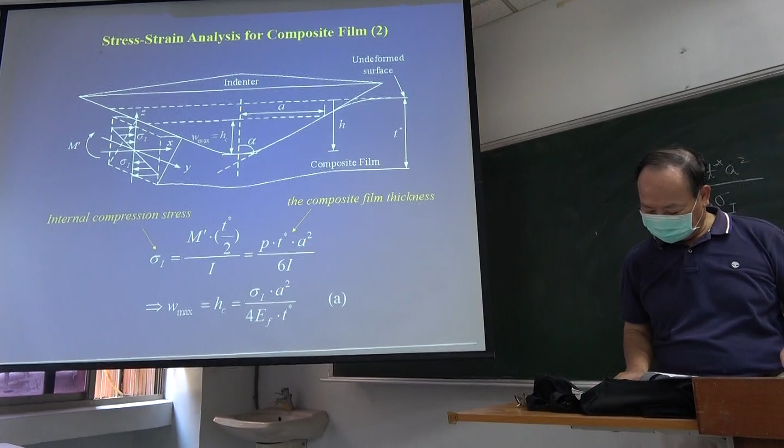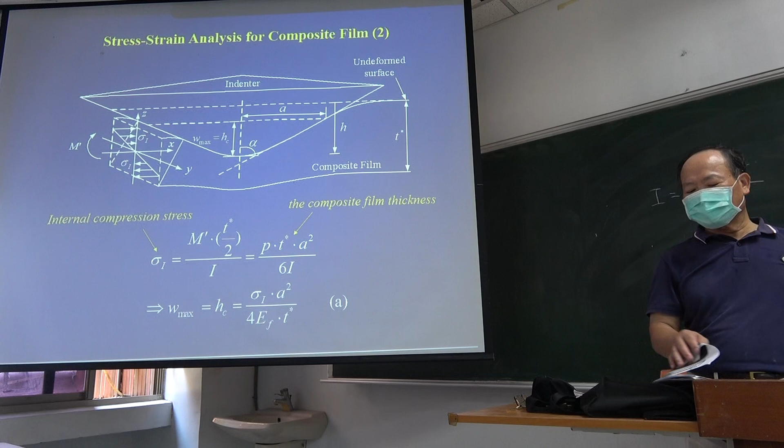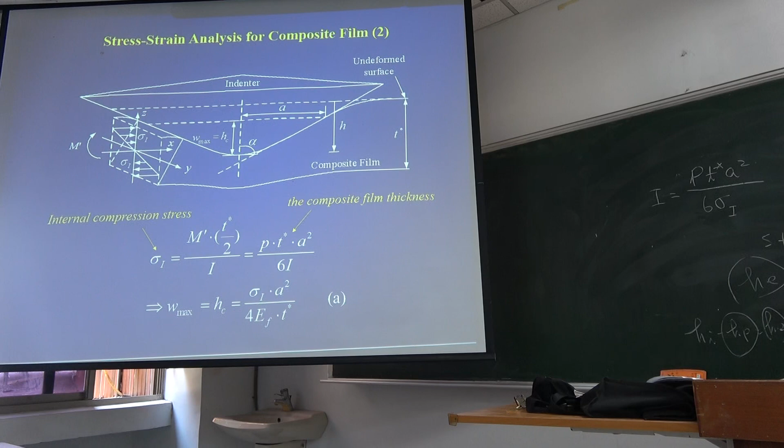Focus your mind on the course, on the class. That's very important because you need those techniques. You hope that in the future you have a good job, but all the good jobs have a very big challenge for you. If you have much knowledge to deal with it, you will feel very happy every day. If you don't have the knowledge, you'll find it's a big challenge. It's torture every day for you.

So you will say, I wanted to work at TSMC. Okay, good. You have a good opportunity to enter TSMC, but you also have a higher risk that you will be fired by TSMC next year. That's because you have to get sufficient knowledge to deal with everyday challenges in the work. There is not a routine work. High pay, high risk, high challenge.

Like my daughter, okay, she works in Tesla. Now she is studying at MIT. Big challenge, high pay. You say TSMC is high pay, but Tesla is about 3 times the pay of TSMC. High pay, of course, but every day is just high risk, high challenge.

Which one do you want? Think about it, all right? So you want something, but you have to pay attention to your task. You have to put in effort that is worth your pay. Your work ability must match your pay.

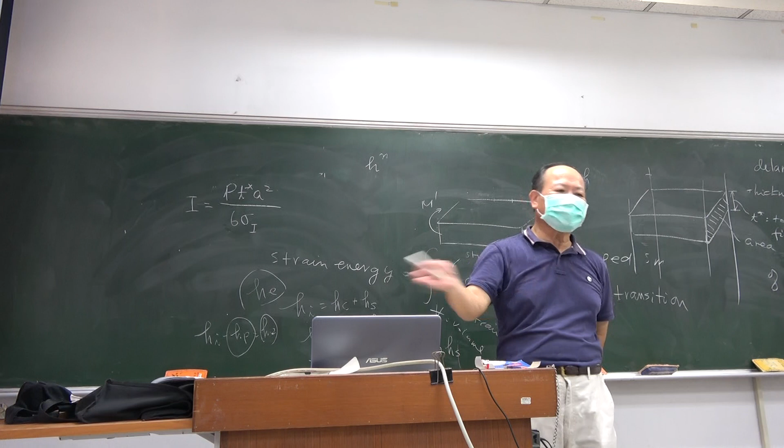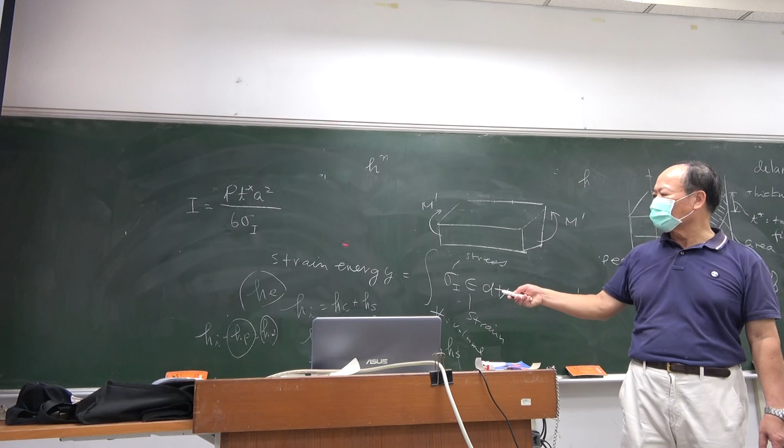Another thing is we can evaluate the different strain energy. Beyond this strain energy, I believe you have some kind of defect taking place in your sampling, okay, all right?

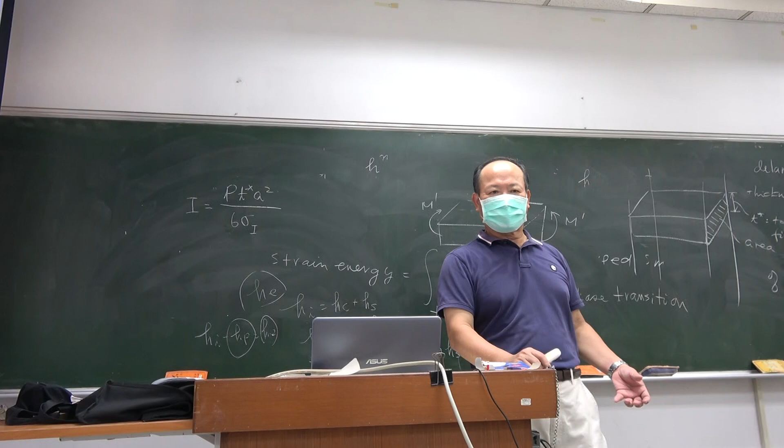Like Samsung developed the IC chip, and then TSMC also developed the same chip. You find that Samsung just has mechanical defects, so there's high resistance, high resistivity, so it's just high power consumption. Power consumption is high, so they cannot compete with the TSMC product. Because within the same field, they have a lot of defects they cannot solve. So this is a real case, this is not a story, okay, it's a real case.

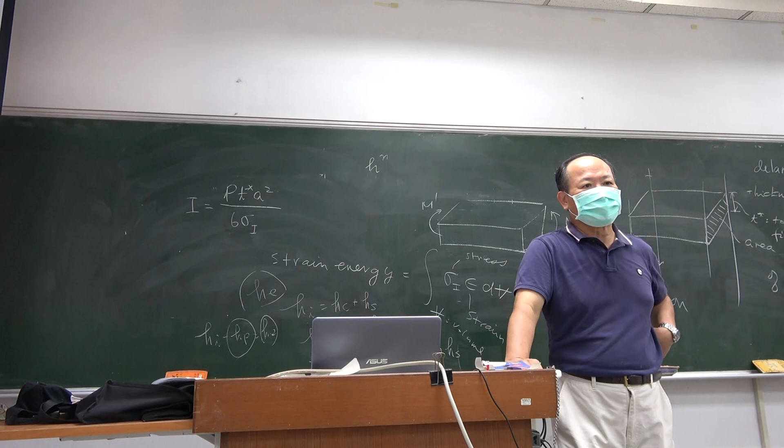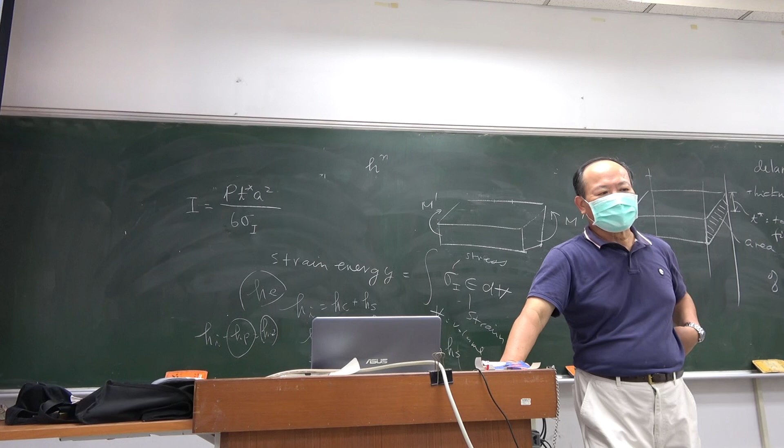So in the competition of TSMC chips, I think how to solve your problem, solve all the defects in your microstructure, becomes very important. Otherwise you prepare the chip, but your ability or capacity or performance is not good, it's inferior to other people's. So this is a big challenge, there's strong competition, okay.

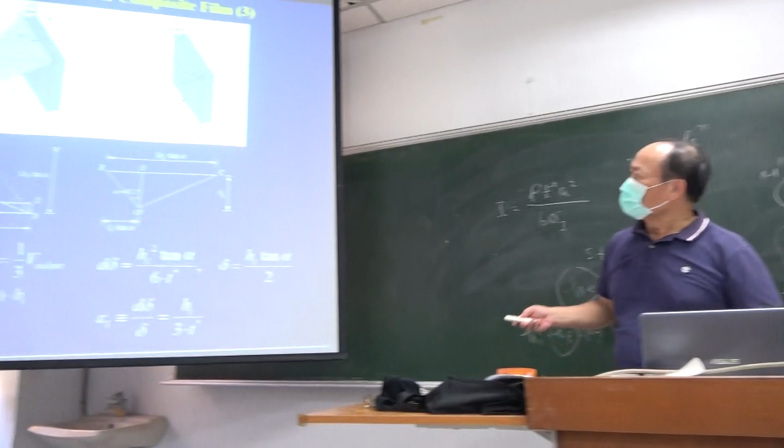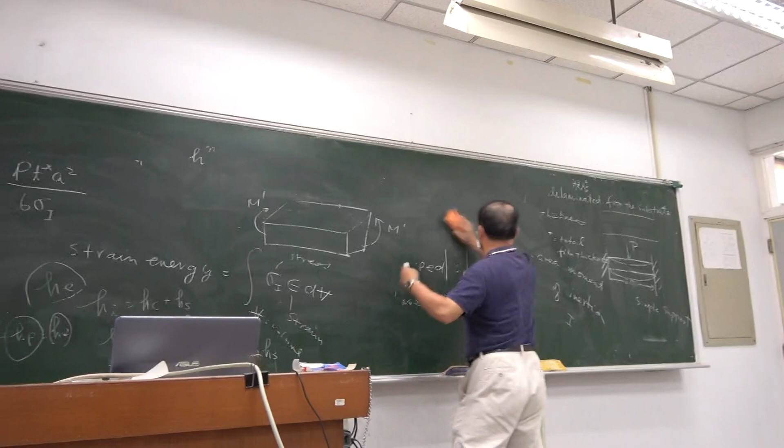This material with constant cross-section - this constant cross-section maybe the cross-section is just a rectangle, okay, like this. And then apply the load P on the other two sides, allowing this material to have tension, have tension outside. Or you can use this constant cross-section, maybe circular cross-section. This is constant cross-section, it's in rectangular form. This is circular form, right?

You prepare your specimen, it looks like this one, and then you apply the P on the two ends of your sample. Originally you have the length - your sample's original length before you apply the load, we call it L. Then if you apply the load, you have the length change, we call it delta L. And the cross section, either this rectangular form or maybe circular cross section, all right, but we apply the same load. We originally have this length, and after applying the load, we have the extension of your sample with delta L. This is one dimension.

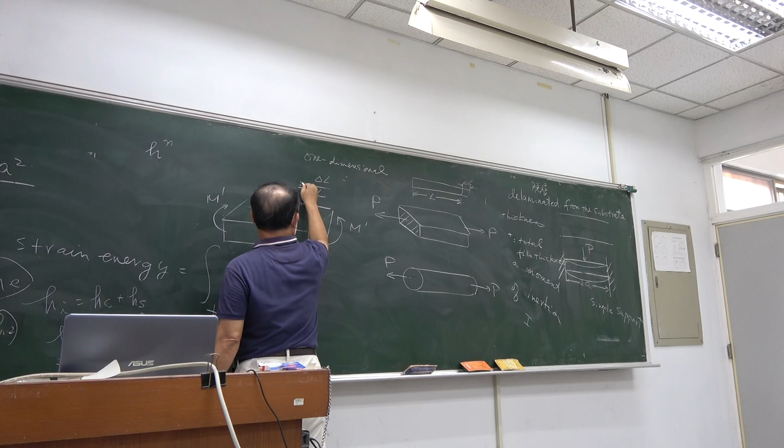Delta L over L, we call the definition. This is strain. This length unit, this is also a length unit. So our strain has no unit.

You will graduate in the future from NCKU. You cannot joke when someone asks you what the strain definition is. You cannot answer wrong, because you are a student at a high level. Some people asking you will give you pay that is relatively high compared with other schools.

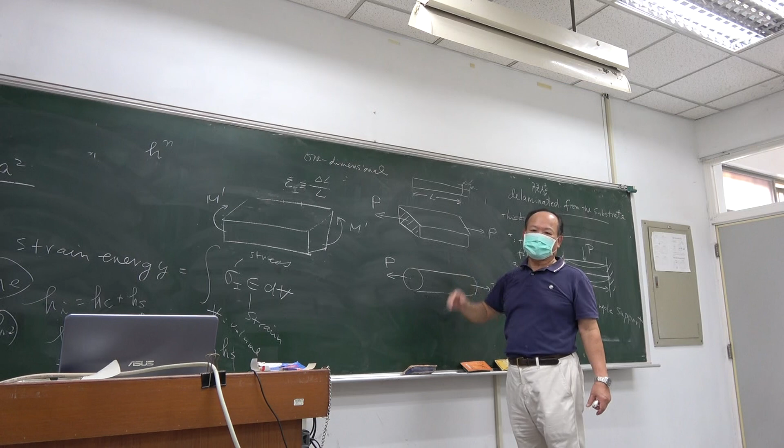So strain has no unit. But your sample should have a constant cross-section. In our case, we use this model. We single out the sample. Our sample is complicated because it's made of several layers of the same film. But we can simplify it to be a rectangular sample and apply the load to the side to obtain the strain.

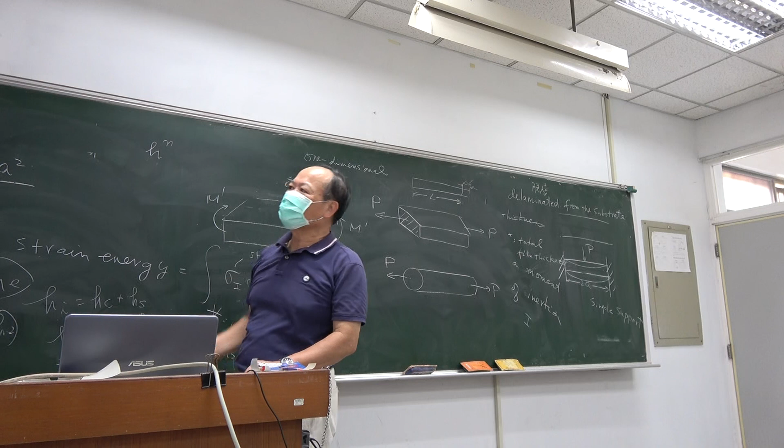Now let me develop the strain first. Here is the indentation depth, here is the indented cavity, the impression mark. Other than the bottom point, this is just other the height. We call this height HC. HC is just the W maximum, like the formula we described in the last PowerPoint.

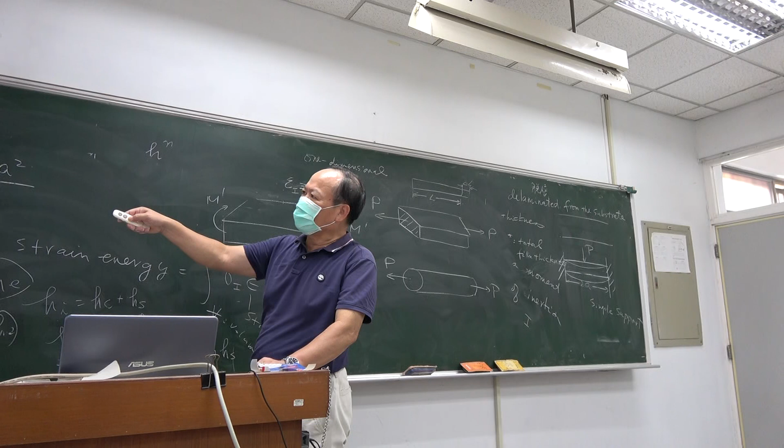Around this central point, this is a regular triangle. Because we use the Berkovich indenter, the cross section of this triangle is a regular triangle. Out of the center, from the bottom here to here, the length is just the real contact depth, obtained from the W maximum. W maximum equals HC, as in the last equation we showed.

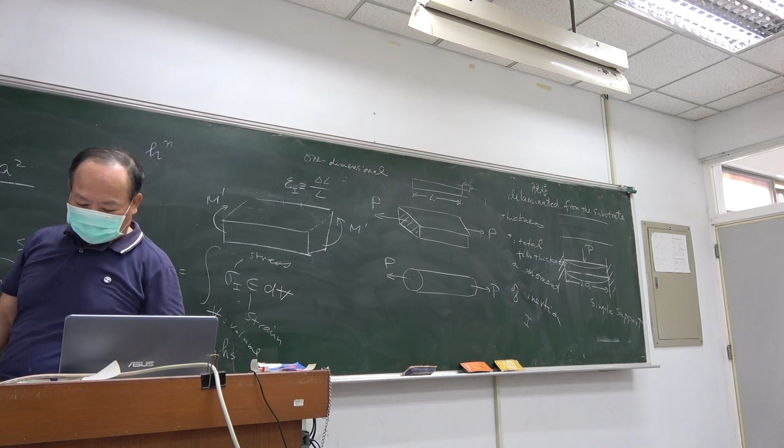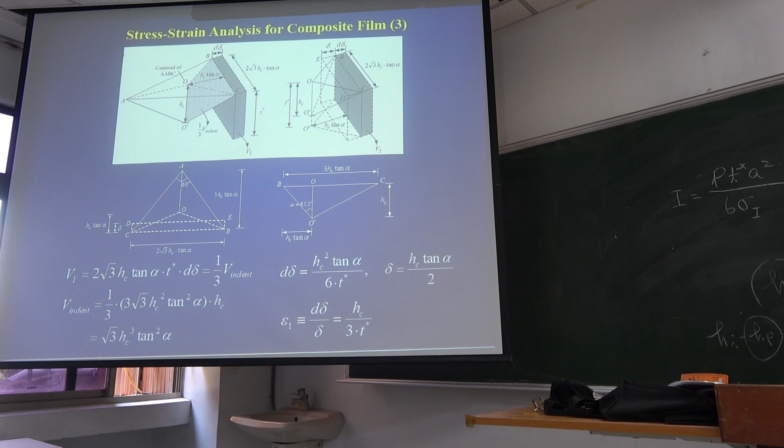Here we have the cavity, the vacancy. This volume of the vacancy can be divided into three portions, because each side has the same length. Each side has the same length, and the length is just this value.

If you have HC, then the side length is just this value. Alpha is just the fixed angle. This cavity volume, the volume of this empty space, can be divided into three portions. One of the three portions is just this gray area, which is just the triangle volume.

This is one-third of the total cavity volume. This value, we allow it to be equal to this rectangular form. Why do we set this volume equal to this one? Because we want to define epsilon for our sample in general, to define our sample as having a constant cross section. So we allow this gray area, this gray volume, created by the real case, to be set equal to this rectangular volume with this single data.

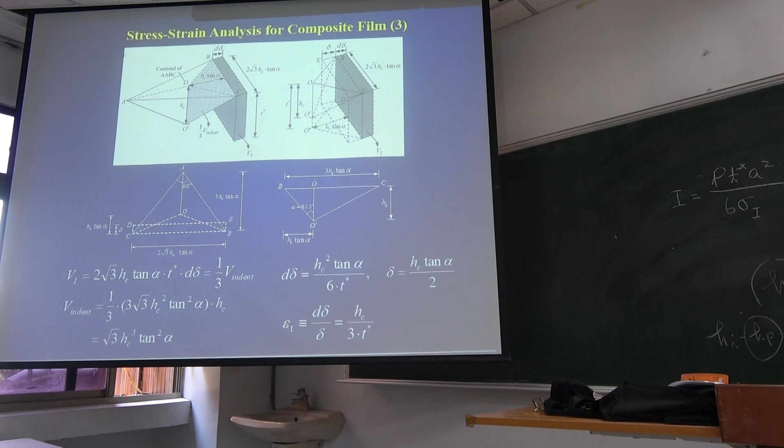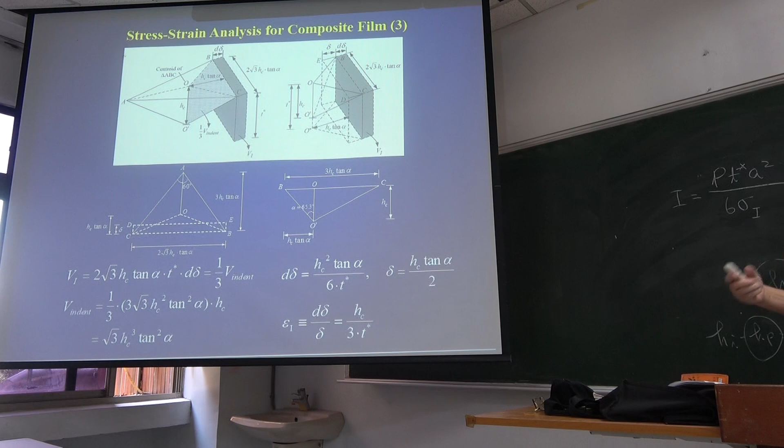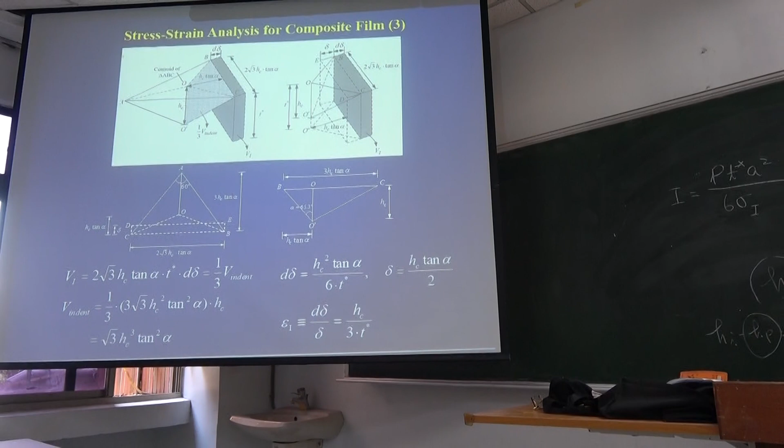We change this cavity in the real indentation case to be assumed to look like a rectangular shape, an extension. This extension with the length change we call d delta, just like this delta L. This delta L is what we applied through the load, creating this rectangular plate extension outward with this length, which we call delta L. This delta L just means the same as d delta. Nevertheless, this rectangular volume equals this gray area, so from this we can determine d delta.

So how do we determine this one? This VI is just one-third of the cavity region, the gray area, which is this volume. This volume is one-third of the total volume. The total volume is V indented.

This is just the total volume, V indented. But this gray area is one-third of the total volume, which is this value. We have the details here. This is just this rectangular frame. This V indented is this value - we have the height, and the cross section is a regular triangle, and the height is just HC. So this total volume is this one.

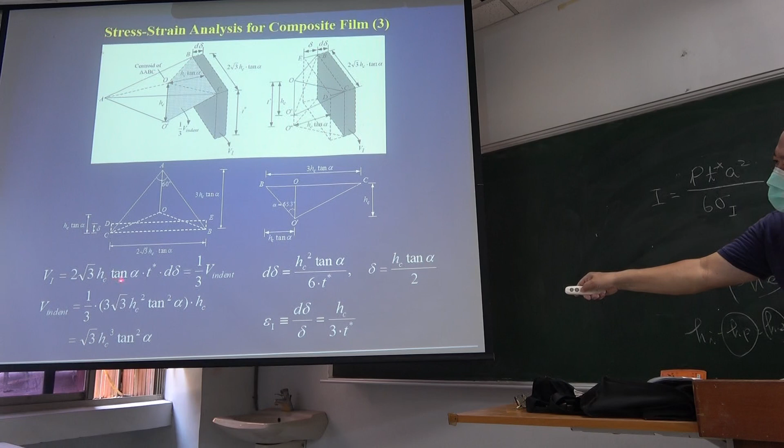So we have the total volume as this value, placed here. Then, setting this equal to this one, we can determine our d delta to be this value. In the meantime, I'll ask you how to determine it - because this real case is not a rectangular compression or tension, but we change it using volume equivalence. This volume equals the constant cross-section volume in this rectangular volume. So in this case, the equivalence of these two volumes allows us to determine the equivalent tension length, which we call d delta.

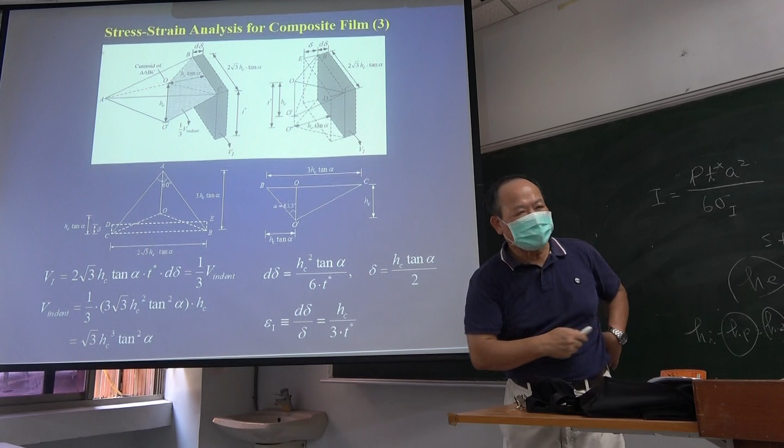But the numerator is created by this column, rather than this one. This is created by our indentation. But it is associated with this volume. This volume is just the triangle column. So this triangle column, we have the three-sided length, and then we have the total length. This total length, we call it T. So this triangle column, we can obtain this value.

This rectangular column, that is to be the rectangular plate, okay? This column, our real volume is created in this form, but it is associated with this column. This column is just used to create this volume, okay? So it just means that this column is associated with this cavity volume, all right?

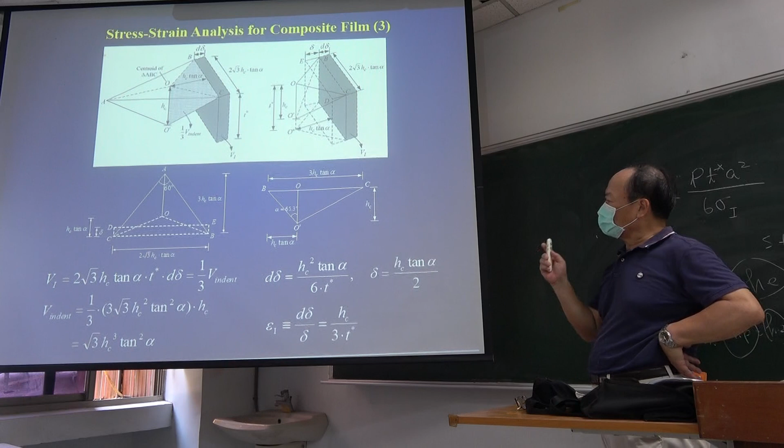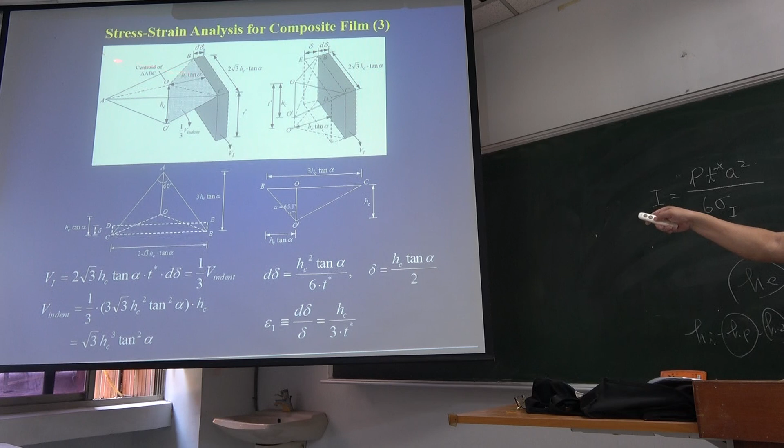Okay, so when you go back home, you have to review the material, how to obtain the d delta. It's just this rectangular volume equal to 1/3 of the cavity region. Okay, and then this portion is related to this side, and then this 1/3 of this portion is just related to this side. So we'll just take one side. That's enough. So our d delta over delta is just from the analysis of these two plots. We can obtain our equation. This equation is very, very important.

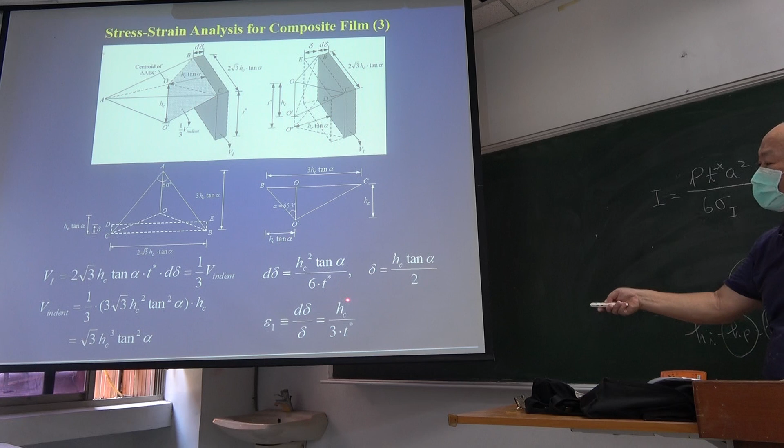Why? You have your H and P plot. You have your load and depth profile. From the slope analysis, we can obtain the HC. Or from our theoretical model, we also obtain the HC. We have HI, then we can obtain the HC. So HC is related to our HI. HI is just our indentation depth. T star, the total film thickness, is available. So this equation allows us to determine our strain as a function of our indentation depth. If our indentation depth is available, you can determine HC using this equation. Then you can transfer your indentation depth to be the strain.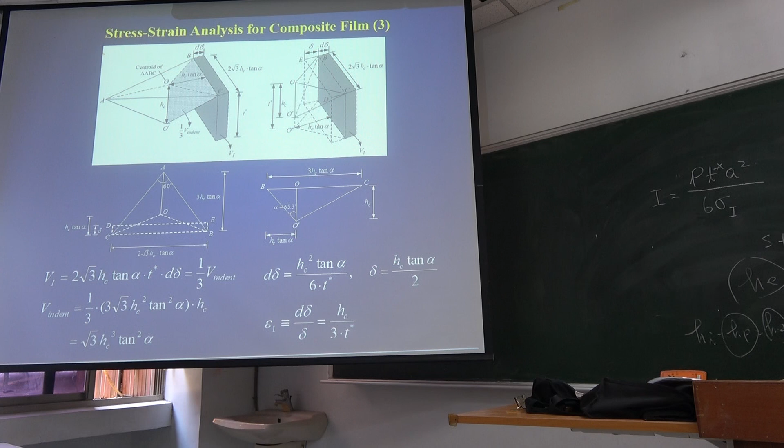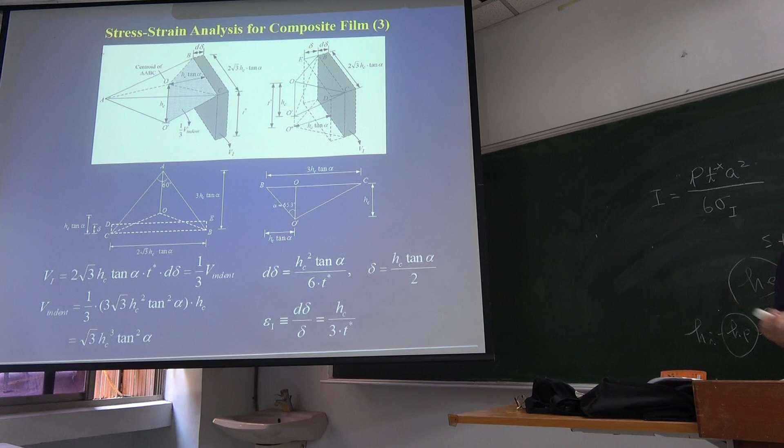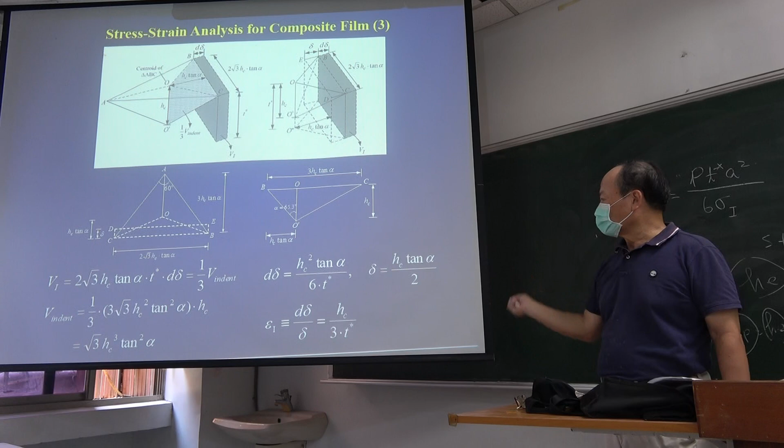Okay? So in the midterm, I asked you, what is meant by this equation? This equation allows you to know how your output changes to be the strain. Then you can use the next step: you transfer your load to be the stress. Here is just our indentation depth transferred to be the strain. So this equation is popularly used in indentation, but it was developed by our lab. You find it's very useful. Originally, some of your experimental data is not used, is useless. But from the formula we developed, we can change our indentation depth to be our strain first. Now we turn to the stress and our load.

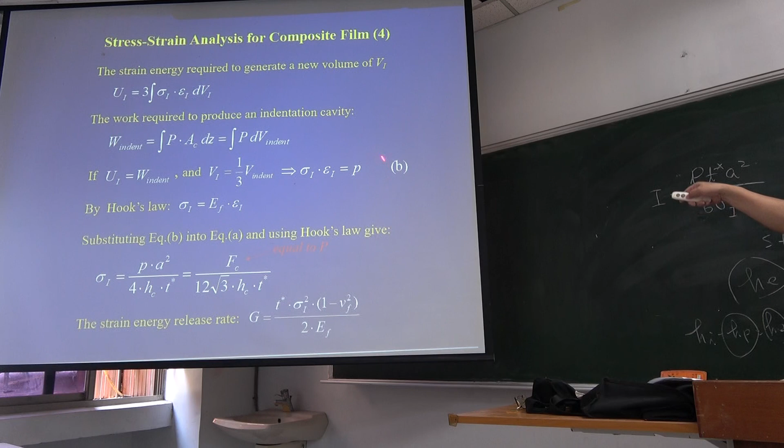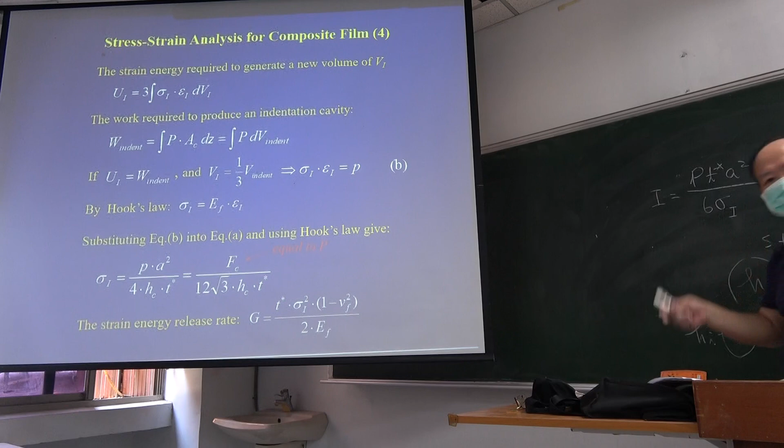Here, let me forward to here. Okay, we have developed the strain. Now we want to develop the stress within the thin film. Thin film behavior is strongly dependent on the stress and the strain arising in the thin film.

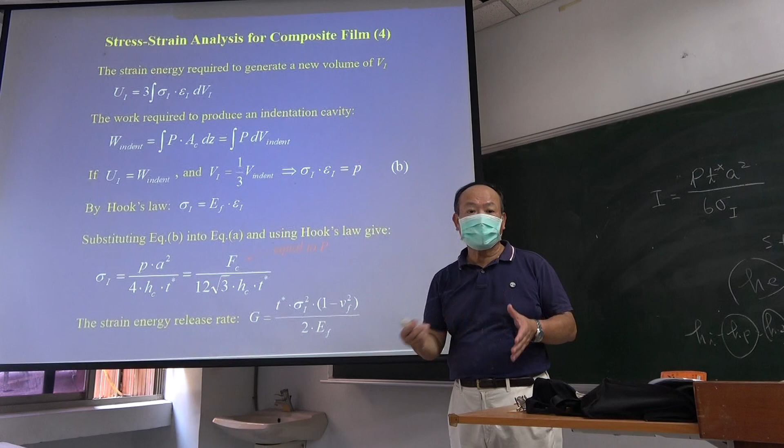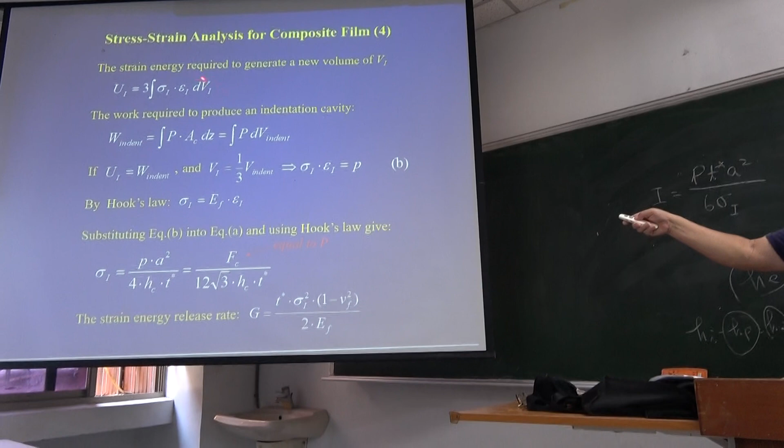All right. Now, we want to determine the stress. We define what we call strain energy, like I mentioned above. If stress is available and strain is obtained, then we will have an integration over the work zone. In the work zone, maybe some fixed area, we have a stress and strain.

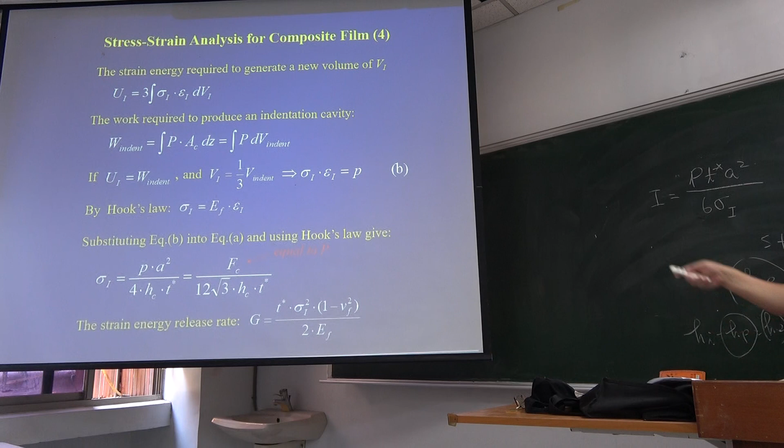We give the times of the stress and strain, and then give the total volume integration. Here, dVi is just 1/3 of the cavity, so we have the three times because dVi is just 1/3 of the total volume change. Okay, so here we have 3 times because we want to determine the total strain energy. So we have 3 times of this one. We call it UI. And then another viewpoint, we can use the work.

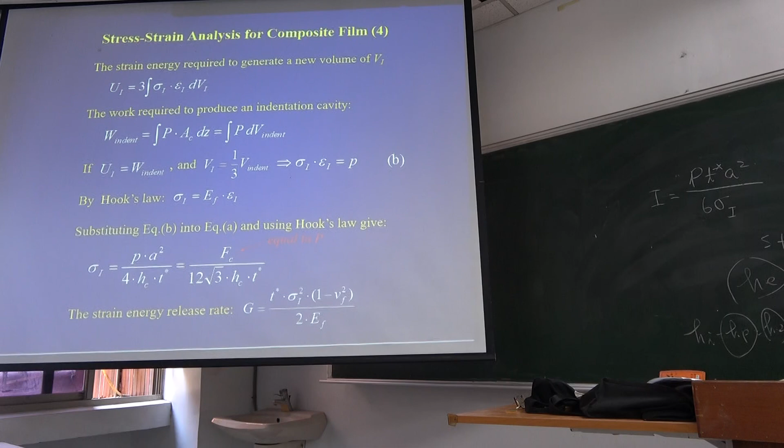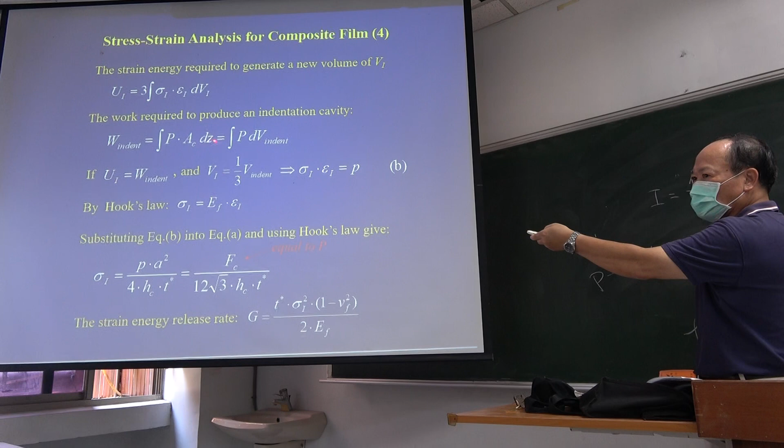Please change the capital P to be small p here. Okay? So this is not a load. This is pressure. Pressure times area is force. Force times the distance is just the energy, right? Force times the distance is just the work. So here, not a load, is pressure. Pressure times area is force, force times the dz. Dz is the downward distance, so it's work.

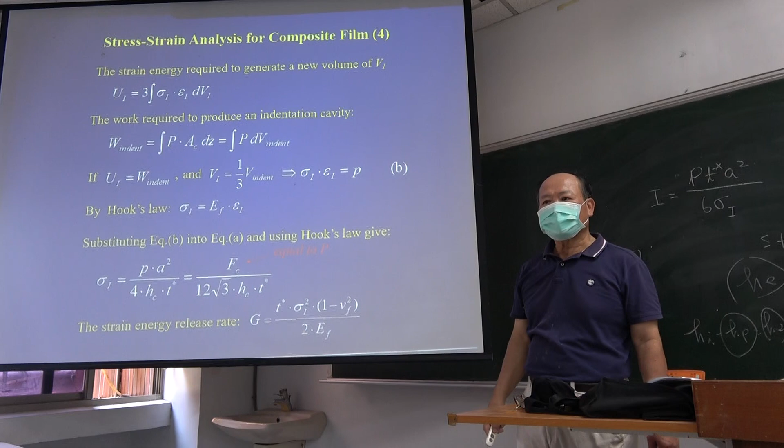So from the work viewpoint, we can define this work. This work should be equal to the strain energy, right? Because the unit is the same. We talk about the same thing, but with different viewpoints. One viewpoint is from the definition of the stress and the strain, and another is just the P. P is just the load or the pressure you apply. So we have 2 viewpoints.

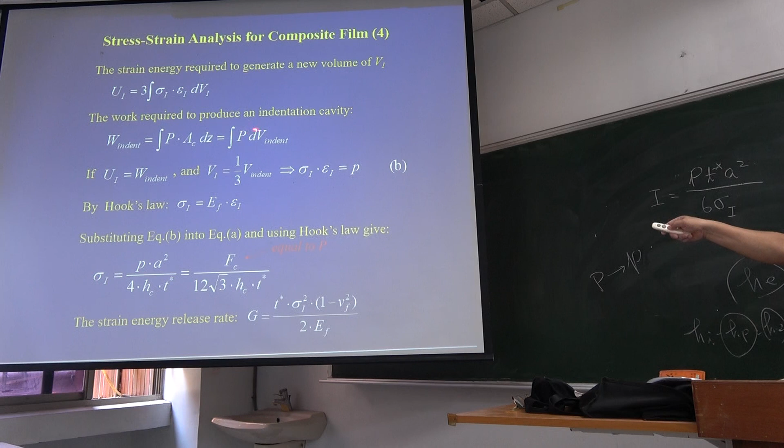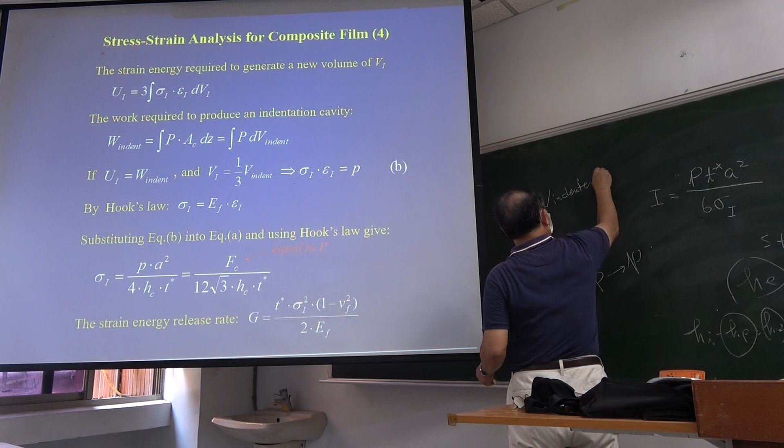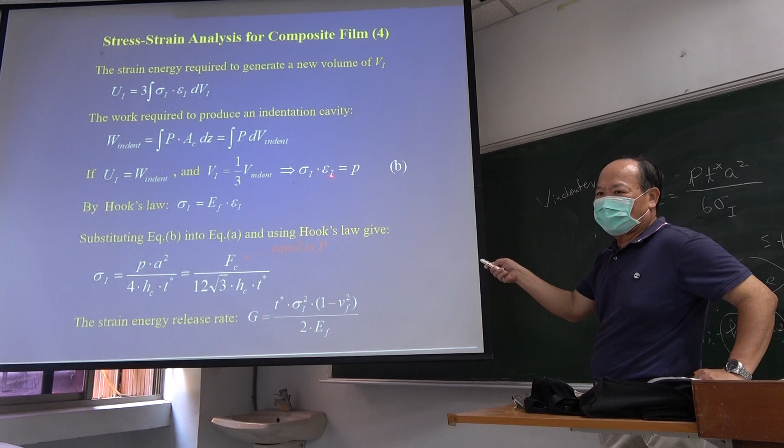So we have this equal, because the dV in the indentation is just 3 times the Vi, right? V indentation equals 3 times the Vi. So you will find that the integration for the dV is the same for this equation and this one. So from this one equal to this one, we obtain this one. So first the p. The stress and the strain times together equal your small p. What is small p? It is the contact pressure you apply.

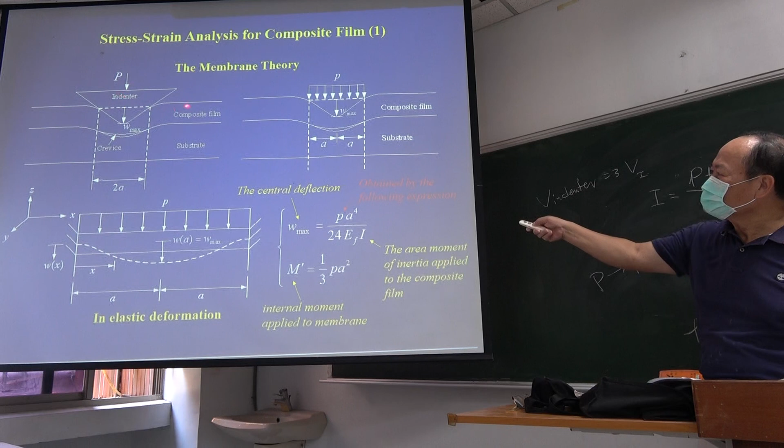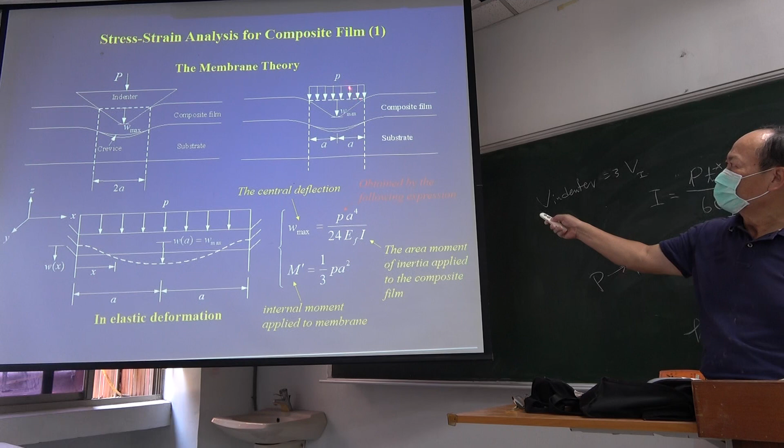But when you carry out your indentation, your force load is capital P. Small p and capital P have a relationship. This small p is just this. So epsilon I, you have obtained. Now you want to determine the sigma I, stress. If stress and strain are available, they times together give your small p. The small p is just a uniformly distributed contact pressure. So we obtain this one. This equation will give the B.

And then with A and B, we want to obtain the internal stress within the thin film. And then we can use Hooke's law. Internal stress and the strain have the Young's modulus for the thin film, for the composite film. Hooke's law tells us we have the relationship, the equilibrium looks like this one. So combining this and this equation, we will determine the internal stress. The detail we'll talk about next time, how to use these two equations to develop this one. This equation is very important.

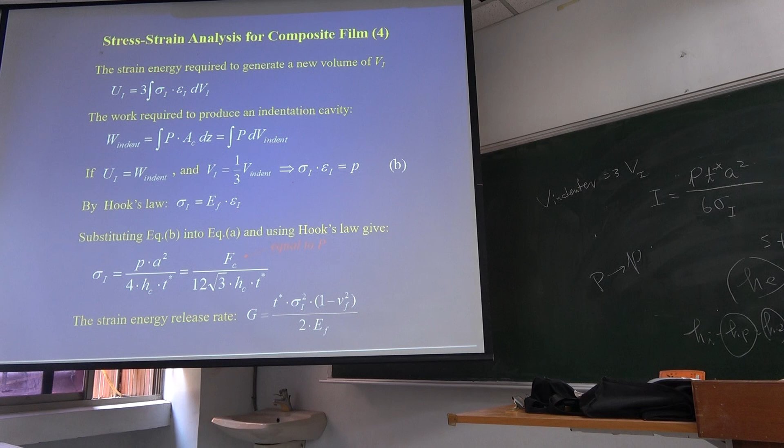First, Fc. Fc is just the load we apply. The load is a known value; you give this load capital P. hc is the real contact depth, you can obtain from your measurement. And the total film thickness T star is also available. From this equation, you will find that your internal stress is related to your load applied. So this equation is also very important in nanoindentation testing. You know the load you apply. Through this equation, you can determine the internal stress in your thin film.

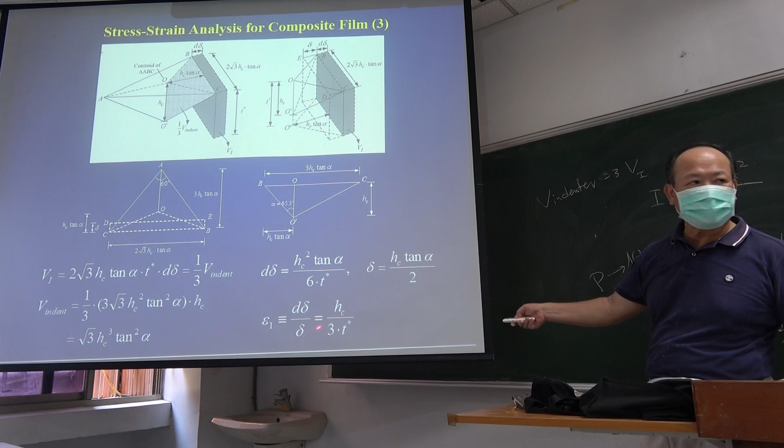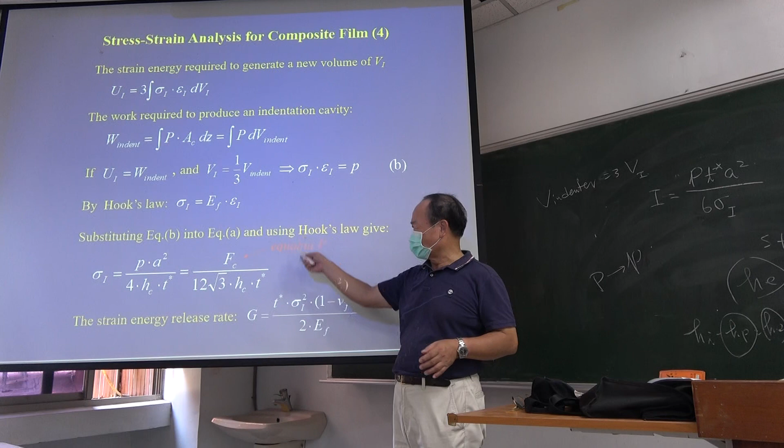So the last equation allows you to determine the total indentation depth, and then you determine your strain. And then with this equation, if you know the load, you can determine the internal stress. So they are very powerful. These two equations were developed by my lab, but I think they're very useful in the future when you do the indentation test. You can use them without any problem because I have checked many cases. So if internal stress and strain are available, we can use the relationship to find many properties. The derivation I will give next time on the blackboard.